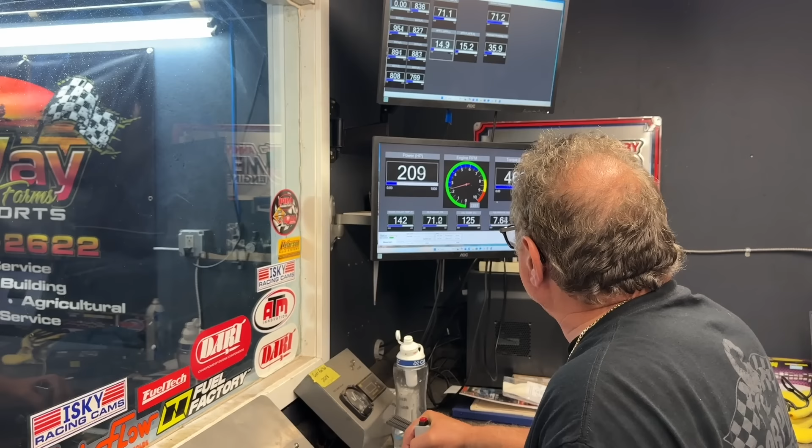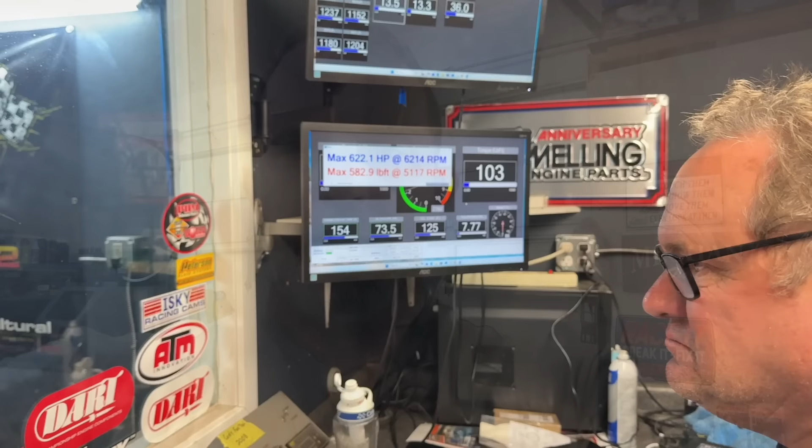Today's video is about two different heads that were tested at Bob's a couple weeks ago. One is 427 small block Chevy. They're both my port designs. One's a 232cc, one's 235cc. Let's get into this because this is some relatively cool stuff.

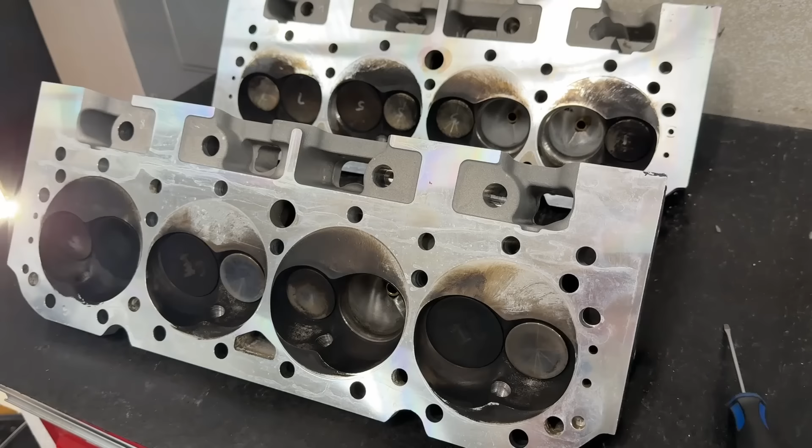Here are the two heads that got tested, and I'm going to show you the flow tests for these heads and also the dyno results with you as well. And we'll do the average powers and stuff as well. But they are a different design, which I'll kind of show you.

There are spots that I'm leaving off because I don't want to give away some of the stuff that was done, because this did take a lot of money and time and research to make this happen. But I'll tell you some of them, show you some of the differences.

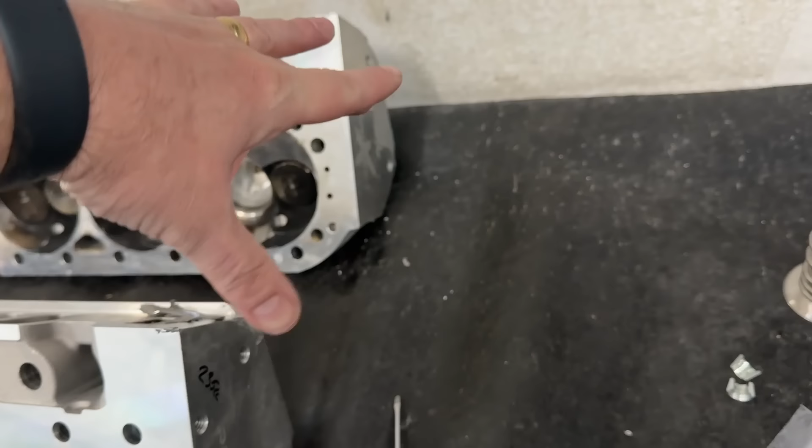So this first one, both of these are Pro Max castings, but they're a different design. This first one you can order from Pro Max or through me. I am a Pro Max dealer. This is the 235cc one.

Pro Max back in 2023 contracted with me to design a port for this, and I ported one for them, and then they had it digitized, and that's their CNC program. It's not on their website, which I do find strange, but I have seen it at the trade show, and I'm kind of happy about that. But anyway, this is what was done.

It is a 235cc intake runner, and the chamber size varies, but as they are now, they're 67 cc's. It has a 210 intake valve and a 1.600 exhaust valve. This is how it looks.

The big thing I want you to pay attention to is the vane, because the Pro Max heads, their Project X anyway, have the vane facing this way, much like AFRs. When I did the program, I left it just like that, I didn't alter that, I just left it like that. But I did think that's kind of a flow manipulation thing. So this plays a huge part as we get into it.

Now here's the thing, this is probably the first set that was done. So I had dyno tested the Project X 215s. I then had these ported, sent them off. Pro Max sent me the very first set, and I dyno tested against the stock 215s. And I'm going to show you some of those results as well.

Immediately after getting done, I was like, I wonder if I change this or this or this in the port, if it would be better. And that's what led to this one. So this 235 is offered through me and Pro Max. Both of us sell it.

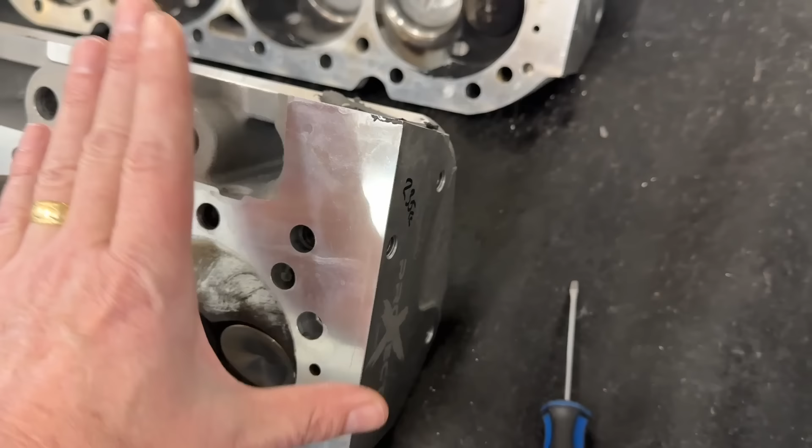As a note though, this is the valve I give you. So Pro Max does a rev valve, which is fine, but if you notice, this one has a back cut on it. When you get them from Pro Max, sometimes they do and sometimes they don't. That's why I charge more than Pro Max for that.

But anyway, again, after doing the test on that, I said, I want to know if I'd change stuff. And this is probably the biggest thing, two things really. I changed the shape on the short side, because the shape I use on this one I will not show you, I spent too much time and effort to do this. The shape on this short side is not the same on that one. I changed it because I wanted to see how that one turned out.

But the other thing, and this part I will show you, has to do with this vane. You see how the vane is this way? I wonder if it's just a flow thing, which looks really good on a flow bench, but may not actually be making any more power. So I changed it to a vane like that.

So this is the new one. The vane's this way, as you can tell, much more straightened out. Could I have straightened it all the way? Maybe, but it's kind of tough just because of the way the material was.

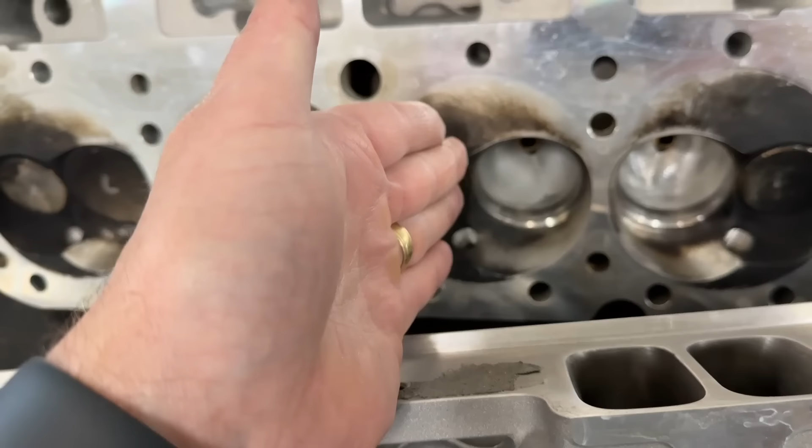So I left it that way, and I changed the intake valve size. This one, the port itself is 232cc's, so it's 3cc's smaller than this one. It's a 2.125 intake valve, so it's got a bigger intake valve than the 235. The exhaust valve you have to shrink down because you're running a 2.125 intake valve. So this has a 1.575 exhaust valve, just like my Dragon Slayers, compared to the 1.6 for this one.

The chamber size is 67 cc's, exactly the same. If you're wondering about minimum cross section, both of them are about 2.5. So the rest of the difference is in the port, which I'm not going to show. As far as exhaust ports, I'll show you the flow numbers, but they're relatively close, because it's a different size valve.

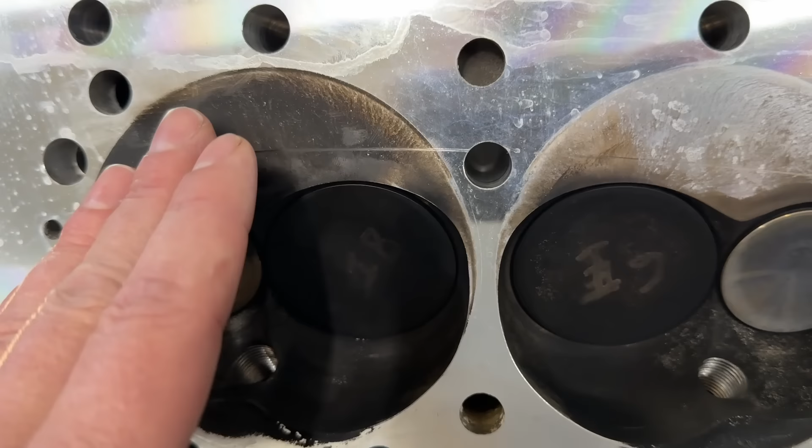Let's look at the difference in the vane. By the way, look at the head—these both came off Bob's. I was hoping to see a dramatic change in the burn pattern or the flow, but they're relatively close to the same. Pay attention to this one, and even this one. Trust me, I studied this for almost 40 minutes of wasted time, and yeah, they're virtually the same.

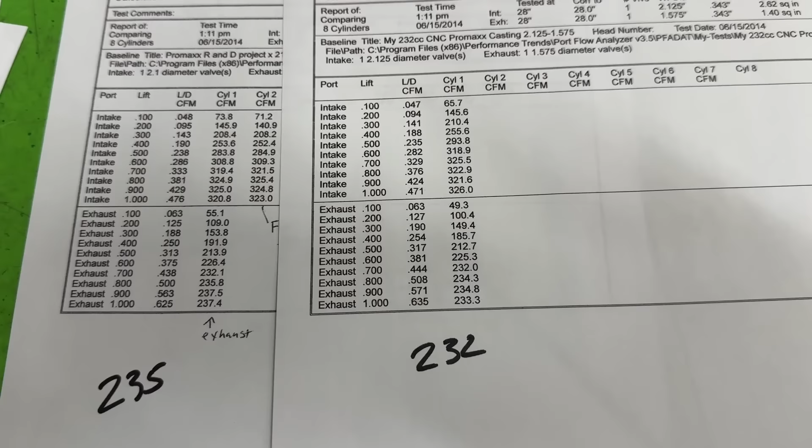Anyway, let's show you the flow numbers and dyno stuff that goes with it. This is the flow number, so we'll start there. This is the 235 and this is the 232.

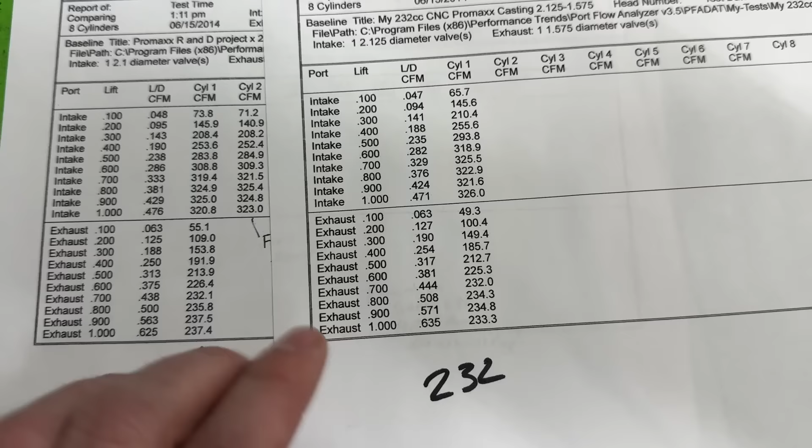So we're just going to compare them. If you're a truck driver, I'll say this out loud so hopefully you can hear it. By the way, they're in the books—I don't know about the 232, but the 235 is definitely in my small block Chevy book. My cord keeps snagging the page.

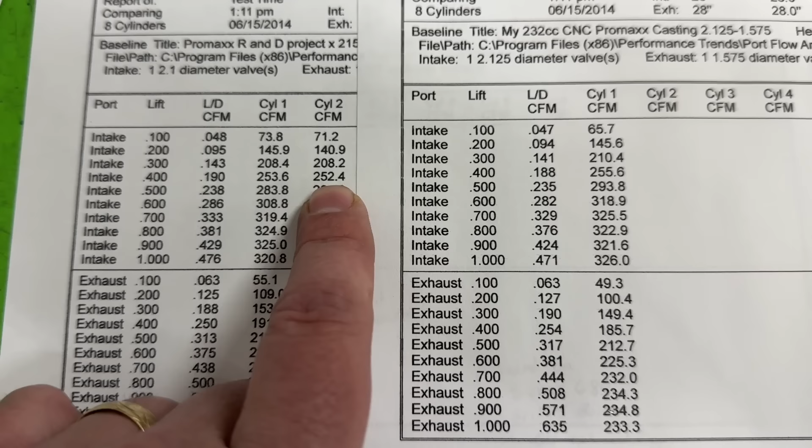Okay, we'll look at 400, that's my most important one. The 235 is 252 CFM, the 232, the smaller one, is 256. So relatively close, just a few CFM.

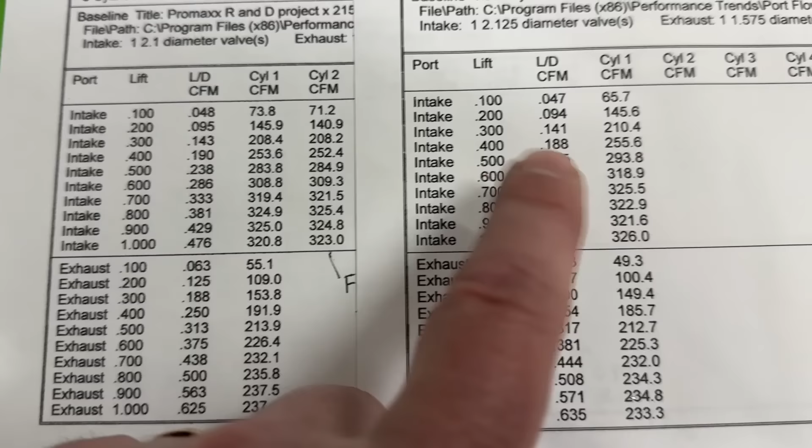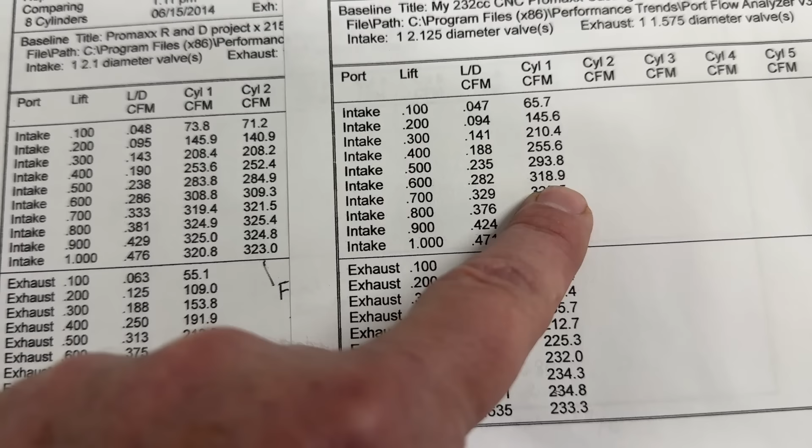At 500, though, this is a bigger difference. The 235 is 285 CFM versus the new version with the bigger valve at 294. That's a pretty good gain. At 600, the 235 is 309 compared to 319 for the 232. Definitely improvement there. At 700, we have 322 on the 235 versus 326, so it flows a little better, then drops off and comes back.

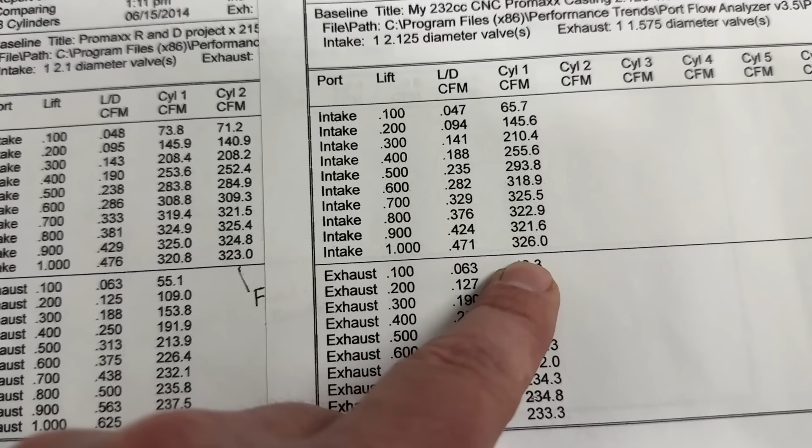This one ends up, the 235 ends up hitting 325. I'm going to pause for a second—I think FedEx is here.

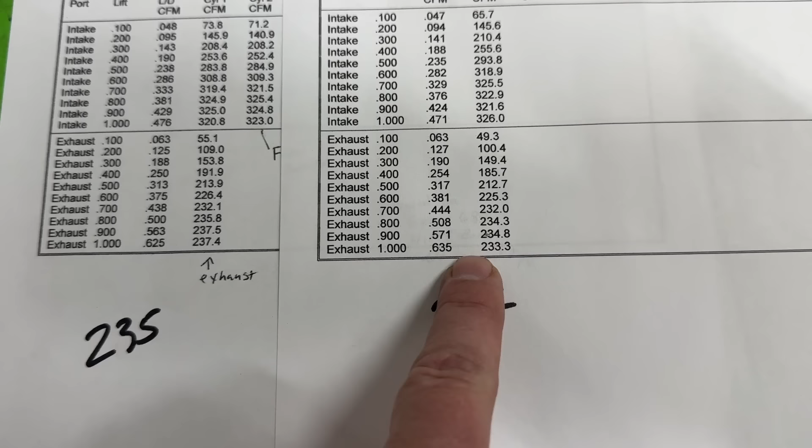Now for the exhaust side. Keep in mind, the 232 has a smaller exhaust valve, so the beginning lift numbers don't flow as well—just look at it. The 235 at 200 is 109 compared to 100 for the 232. Smaller valve hurts it, but we'll focus on 400.

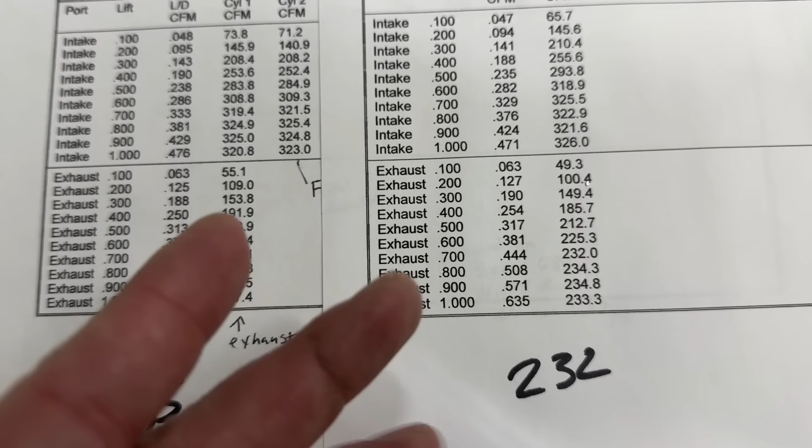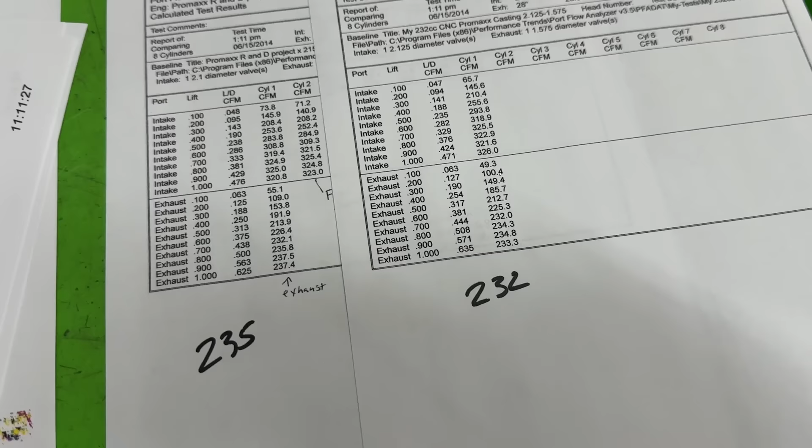192 on the 235, 186 on the 232. So it's off, but not by a ton—you look at 214 versus 213, they're somewhat close. Peak is 237 to 233 or 235, they're right there, close enough. So as far as flow wise, they're relatively close. There's maybe some advantage on the 235, but not overwhelming. The dyno does tell things a little differently, but not as much as I was hoping for.

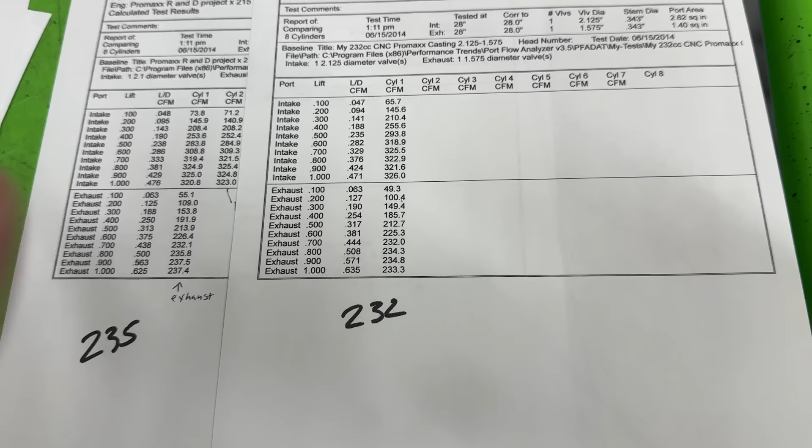So here are the dyno numbers. If you made it this far in the video, I thought I'd tell you the engine specs. I actually did this first, and that's the reason I deleted the video, because somehow it didn't record my sound. Anyway, here are the specs on the engine.

It's a 427 small block Chevy, 4.125 bore, 4-inch stroke, about 10.3 compression ratio. It's got an Isky hydraulic roller camshaft, a shelf cam—the OMG 79 cam, which is 248 degrees intake, 254 exhaust, 109 lobe separation, and .640 lift with 1.6 rockers. It also has a Trick Flow R intake that's been milled down—you'll hear more about that later in this video—and a 1050 4150 carburetor with annular boosters.

Here's the power from the 235cc heads. These made 621 horsepower at 6,300 RPM—yes, I round up—and 584 foot-pounds of torque. But on average, between 3,000 and 6,800 RPM, it made 602 horsepower and 539 foot-pounds of torque. Not bad, it's very respectable.

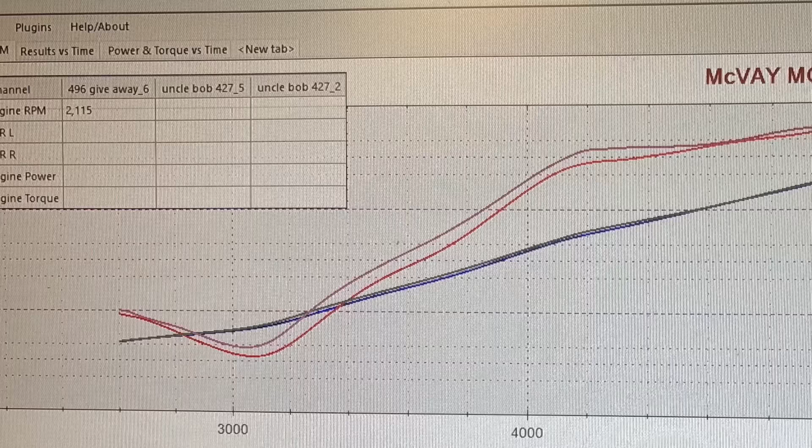This is the power from the 232 head. It made 625 horsepower at 6,500 RPM and 586 foot-pounds of torque. So it gained 4 horsepower peak and 2 foot-pounds of torque peak. Averages were 604 horsepower between 3,000 and 6,800 RPM and 541 foot-pounds of torque.

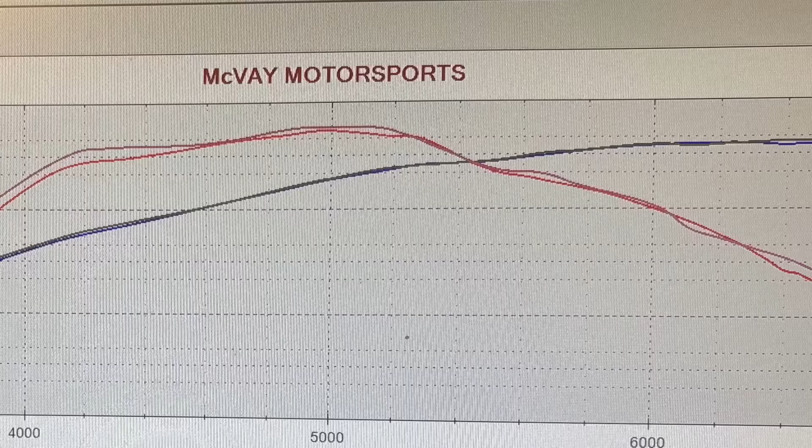So on average, it gained 2 horsepower and 2 foot-pounds of torque. So there's that. Here's what the graph looks like. You'll probably have to zoom in to see this, so do your best. That purple line is the 232, so you can see it's lower, kind of matches in the center, and then it's virtually identical as you go up through the range, so it trades off and on, but close.

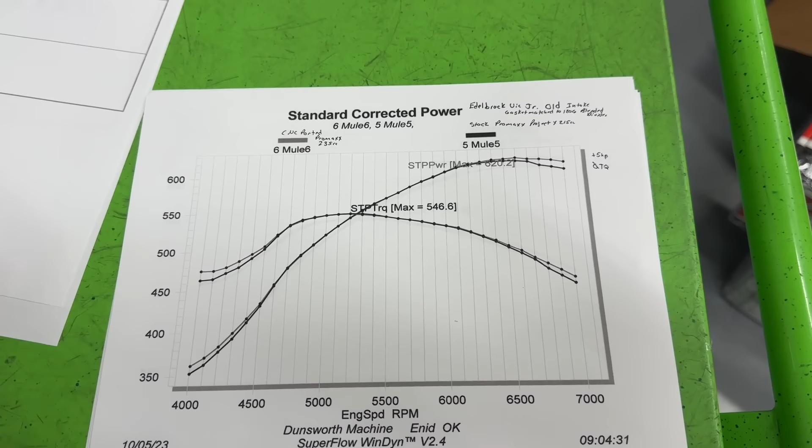Now that you saw the dyno numbers on Bob's 427, I want to tell you a lot of R&D went into the 235. I actually tested it with a whole bunch of different heads and intakes, and some of this gives insights into why there isn't as big of a change or difference in power as what I had hoped for. So bear with me as I try to explain this.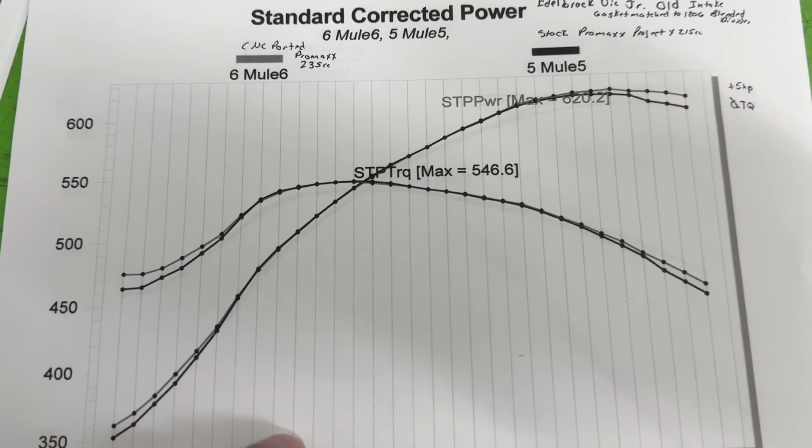Now the picture isn't colored, but don't worry, wherever you see the lines are above, that's the 235. So at the lower RPM, 4,000, the 235 is beating the 215, and also at the top.

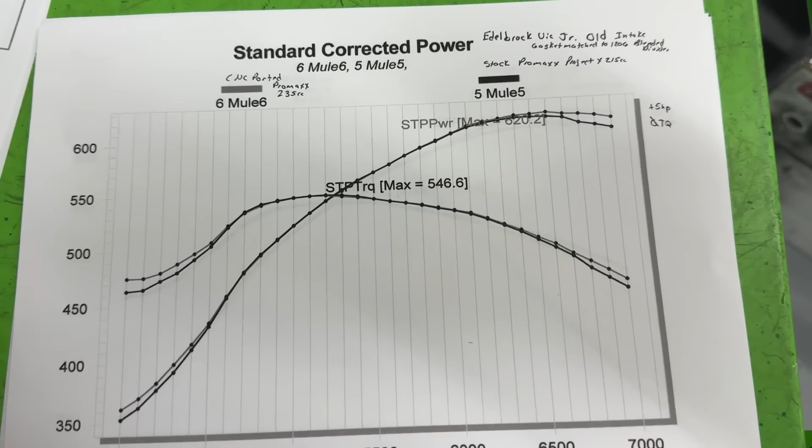Now here's what's interesting. This is with the Victor Jr. intake, which is the same one we also used on the 406 at Bob's. It's magic, it's been great on everything. But if you notice, the differences really aren't that great.

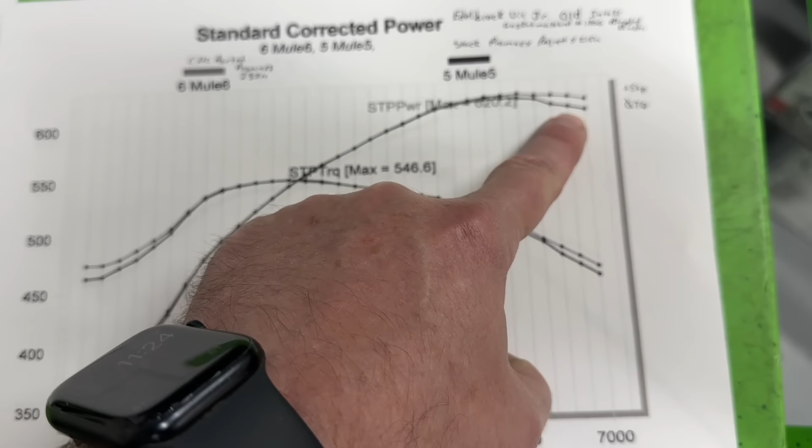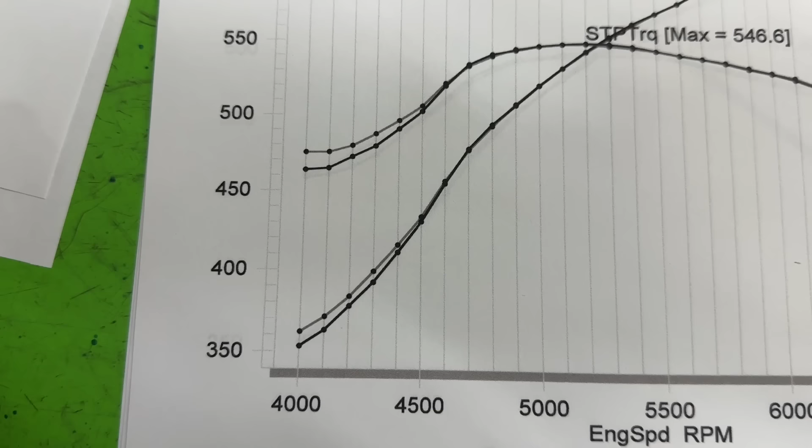It's 5 horsepower and 0 foot-pounds of torque difference. But there's some differences at the top and at the bottom, which goes against conventional wisdom, because I've been saying this forever - just because you hear it on the internet, velocity, velocity, velocity, every time.

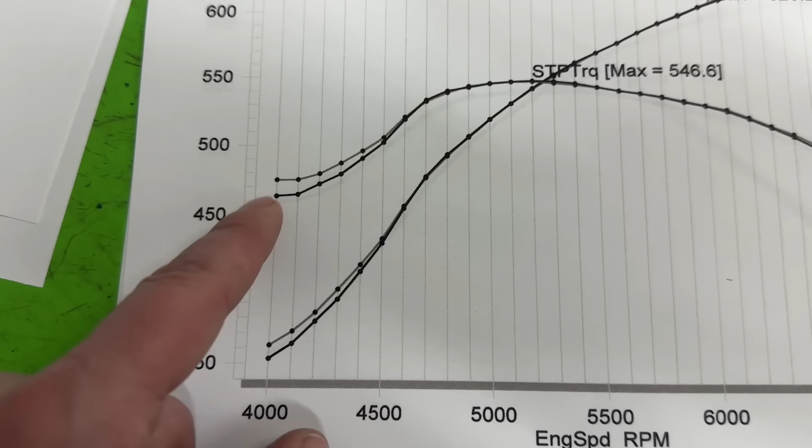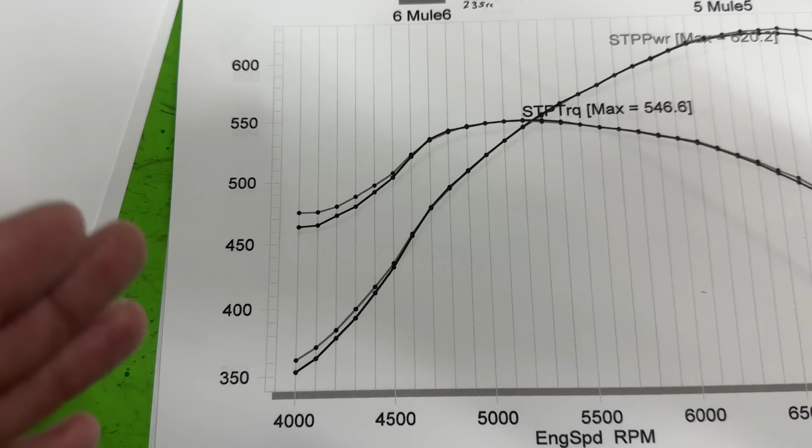And it's been almost uniform at this point. At the lower RPMs, usually between 4,000 to about 4,500, the bigger head does better - almost to the point I could say with certainty it's better. Now, if we went to a lower RPM, maybe it'd be different, but in that range, something about it, the bigger head's better. So then it's a lot better here. Something to think about.

However, if you notice, that's not much of a difference, right? It's only 5 horsepower, somewhat like what we had with the 232 versus 235.

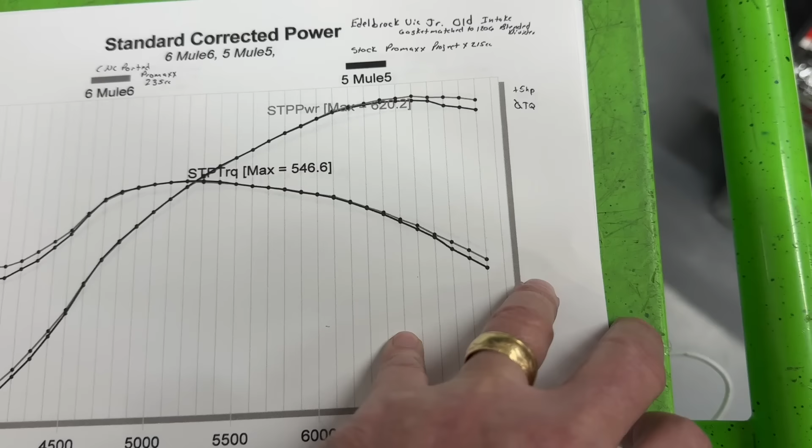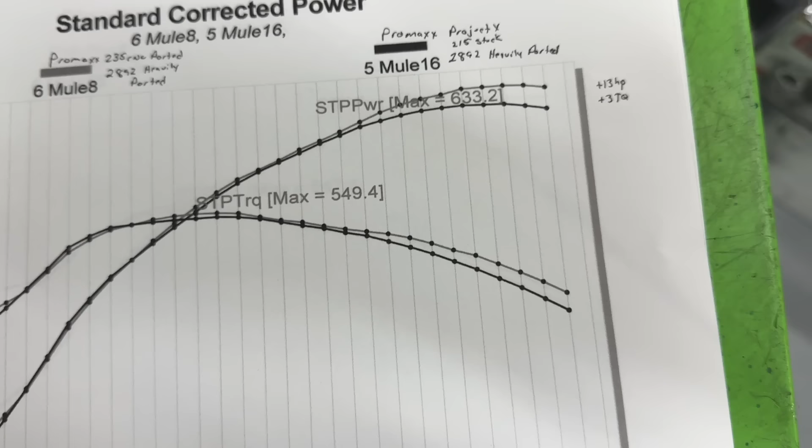But we switched intakes. This is the difference when we switched to a heavily ported 2892 that we had at Bob's. Again, the bigger jump here, the 235s - but the difference grows at the higher RPM. So with this intake, the difference between the two heads was 13 horsepower and 3 foot-pounds of torque. So the differences grow when you have better intakes on it.

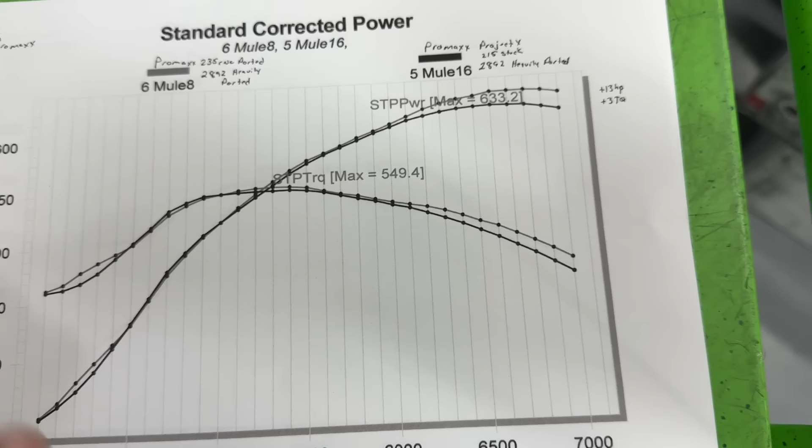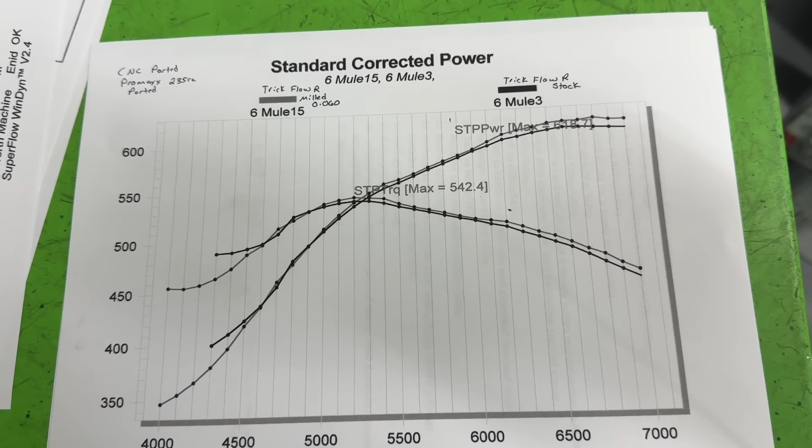So if you've got a crappy intake, it's kind of holding you back, you're not going to see the differences. And the final thing I want to show you is the intake that was tested on Bob's - a Trick Flow R that I owned because I had done this test. The very first time we put the 235s on, we put the Trick Flow R back on, and I was like, this does not line up well at all.

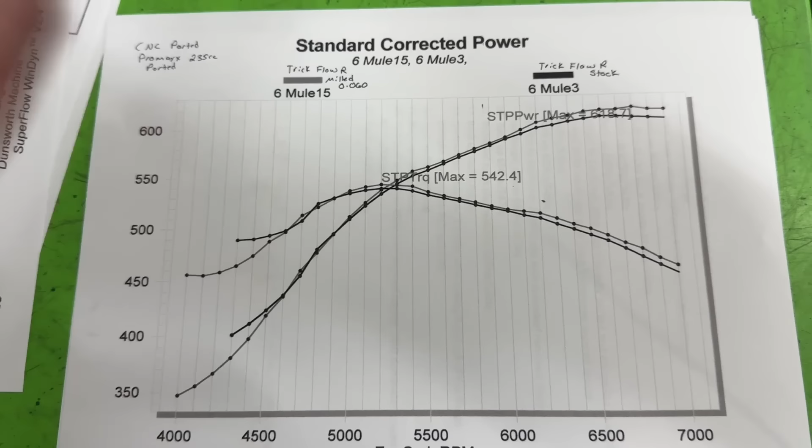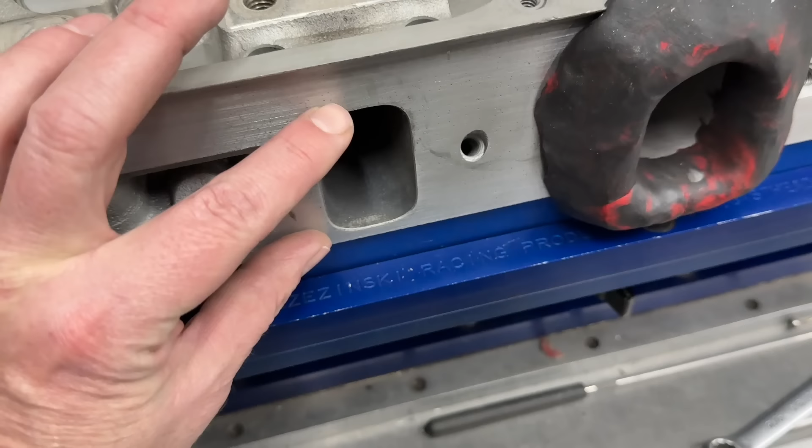The ports were off because it's not port matched, it's just high - because the head's been milled, so the intake's sitting higher up on the heads and it's blocking the roof part. So let me give you an idea: here's your port, the intake should be sitting with its top here, but instead it was way up here. I could literally see the top of the head.

Not good. So what we did with that Trick Flow R is we milled 60 thousandths off each side, and what that does is it causes this to come down to meet the top of the port.

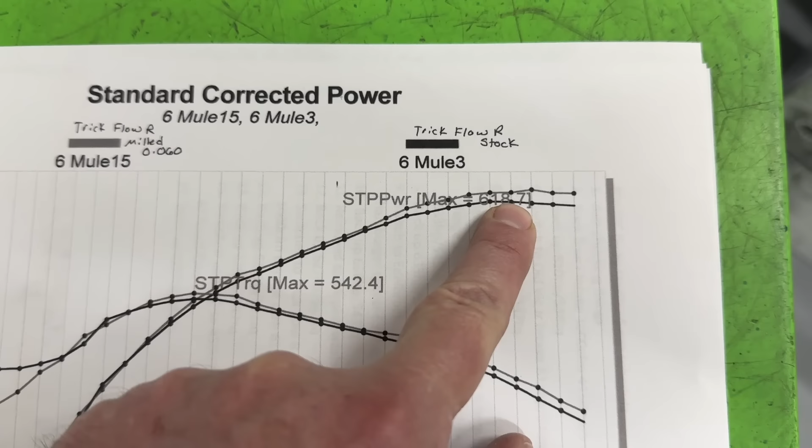It gained 15. It didn't do much on the lower RPMs until about 5,000. From that point on, it gained.

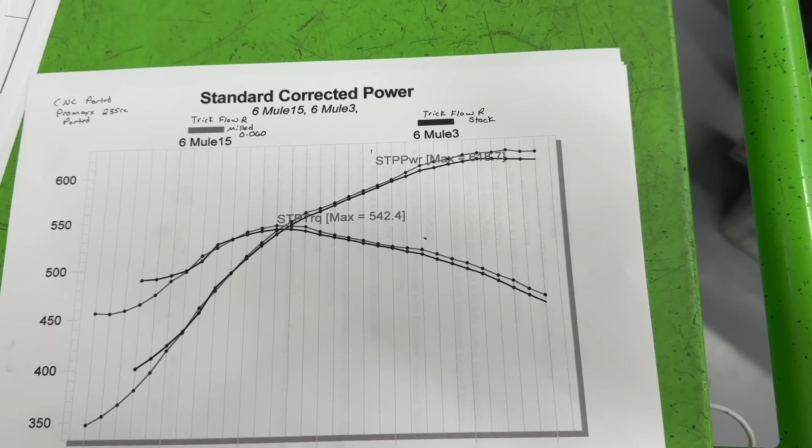This is the intake we use to test the 215 and 235 heads. This intake doesn't seem like it holds it back, but I thought I'd share that with you. It's an interesting thing, and that's why I used it at Bob's.

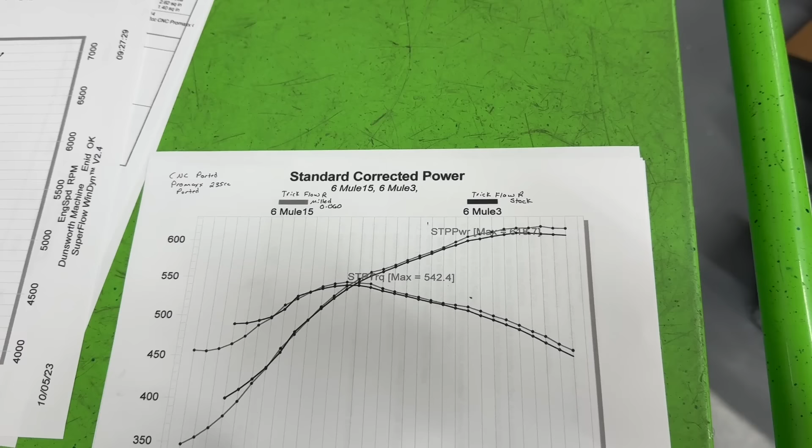So the differences between those heads, not as much as I'd hoped. People keep saying things online continuously, and every time I test it, there's a little nugget of truth to it, but more BS than there is truth.

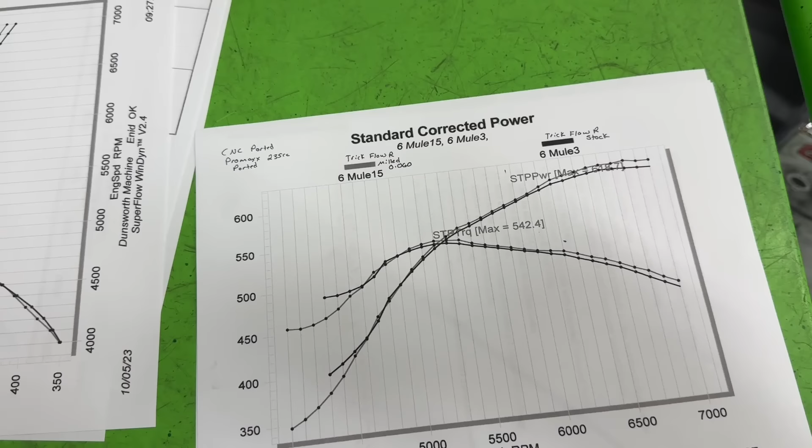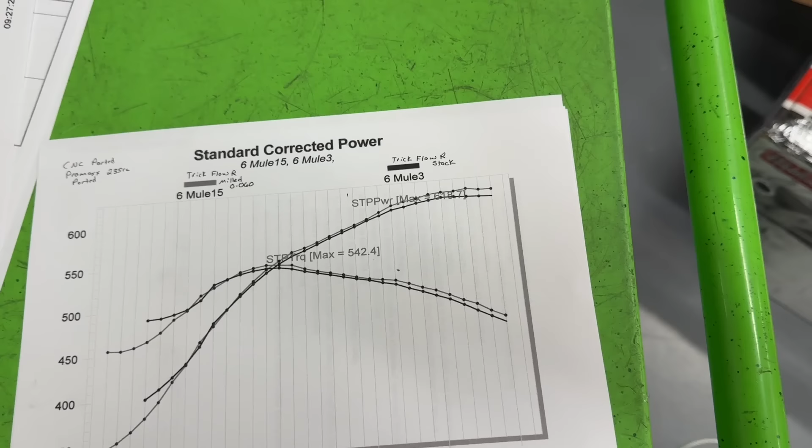Because I used to hear velocity, velocity, velocity, which is true, but not what you're thinking sometimes. That's why we test. So velocity is important, don't think I'm not saying that. But so far, every time, it's not the lower RPMs. It seems like in the higher RPM is where the velocity makes a difference, not the lower, kind of opposite of what the internet says.

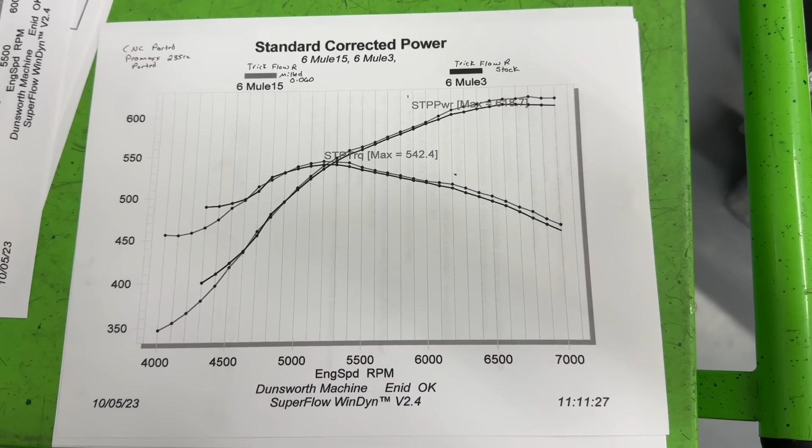The other thing the internet kept saying was a whole bunch of different things that just turn out not to be true, at least every time I test it. And I know I'm going to get some backlash even on this, even though I actually have results.

So the other thing I kept hearing was shape. The shape is the most important. If it's not velocity, they're like shape. That shape that's in the 232 has a better velocity coefficient. So let me try to explain.

If you take a probe, that's what I've got here, right here. This is a velocity probe. And I put it in the port, inevitably, and this happens with all heads.

On the short side, typically you have faster speeds through here, slower speeds up here. The port design on that short side for that 232 is more uniform. In other words, if I went from the slowest speed here to the fastest speed here, the difference is less than it is on the 235.

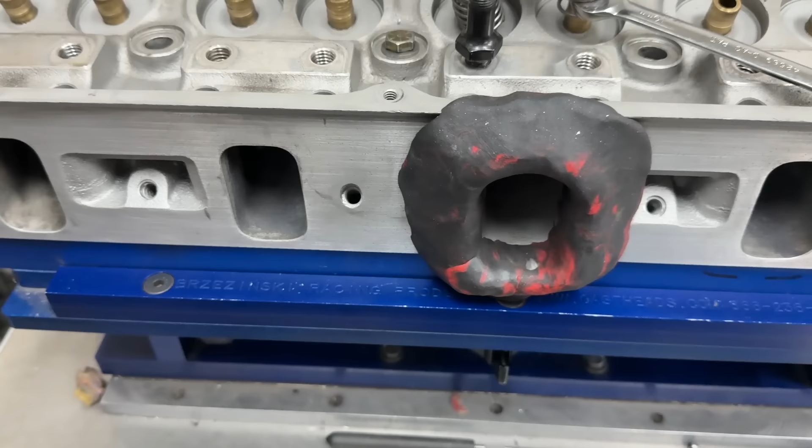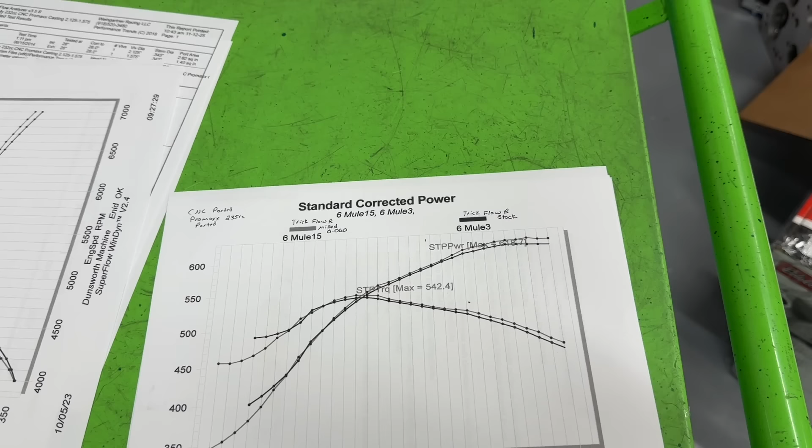The shape seems like it's magic, wasn't worth that much. So here's the catch though, and that's the same thing with velocity. It's not uniform. If the engine was turning more RPM, or we had, making way more power, the differences between the shapes might have been there. But in this application, and 620-something horsepower, doesn't seem like it's doing much.

So something to keep in mind, but there's one more thing I want to show you, because this one, if you own the Promaxx heads, you need to know this. This is the last thing I want to leave you with, and this is somewhat important, so pay attention.

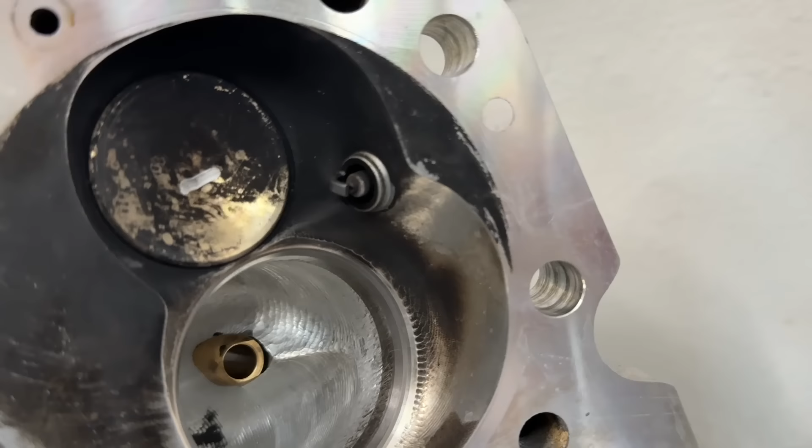Now, was it quite as bad? Well, my camera's having a hard time. There we go, let me see if I can get there. Yep, there's the bad one. You can see the top thread completely. It wasn't quite as bad, maybe 20 thousandths less, because whenever it does the CNC stuff, it cleans this up, so it removes like 20 thou. But this is still obvious.

It's obviously not right? I was like, ooh, I'm not liking that. Because, and I'm going to go with this, so bear with this, it's going to get a little tangent here. I had a guy comment, and trust me, it plays a part in this.

I had a guy comment, and he said, I showed last Saturday's video, he's like, this head, right? And he was talking about this head. This head is trash, trash. Because you could see the threads right there. See how the spark plug is? You can see the threads.

This one, by the way, is very similar because it's not all the way out. This covers up more and actually somewhat puts it in a better position. But anyway, he's like, that's trash. You know, Jim's Automotive, he cleaned those threads up. That's going to cause pre-ignition, which I've got to get into real quickly.

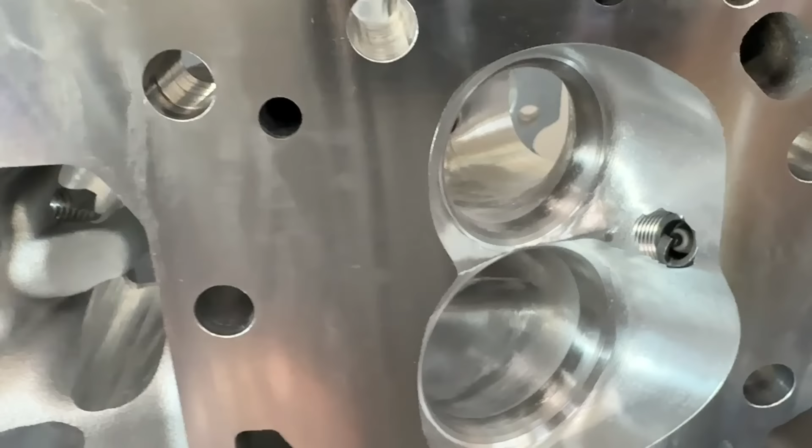These threads that you see right here, and I'm going to back out the spark plugs, you see them. Those threads in the aluminum are not going to cause detonation. You're like, it won't? Let's just do some science for you real quick.

The hottest part of the chamber, what's the hottest part? The hottest spot in the chamber, because you say hot spots cause pre-ignition, which I agree. The hottest spot in the chamber is the spark plug, not the aluminum, period. It's the spark plug. You're like, let's just do some science. Aluminum transfers heat way better than steel, just the facts.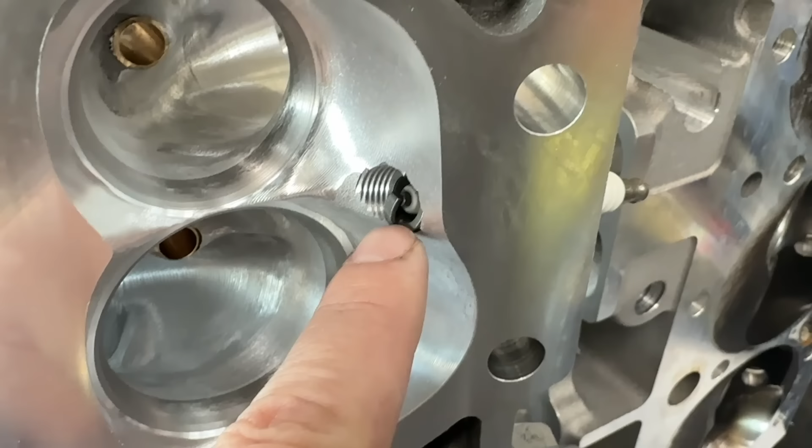Hitting it with electricity, heating it up, it can't transfer heat. It's steel, so it doesn't transfer as well. That will, that won't. Stop saying that stuff.

However, this is a problem, because in this case, if you look at it, you've got threads showing. So you actually have 100% sharp threads and steel. Look at this, you've got steel out there in the middle of heat. This will cause pre-ignition, more so even than the spark plug electrode, because that's a very sharp, fine point. It can definitely hold on to heat.

It's steel. There's no water trying to cool it where it is. It's out there exposed, unlike this where there's water behind it. That will cause pre-ignition. So not ideal. And you're like, so what do you do? Here's what you need to know.

The Promax heads, and even this is my DB head in case you're wondering, come from a factory in China, a guy named Steven Sun, and they're made by him. The problem he has, and it's not this part, it's not that we cut out too much of the chamber, that's incorrect. It's that when he machined this flat spot right here, he sunk it too deep. So he cut this too deep, pushing the spark plug this way too much.

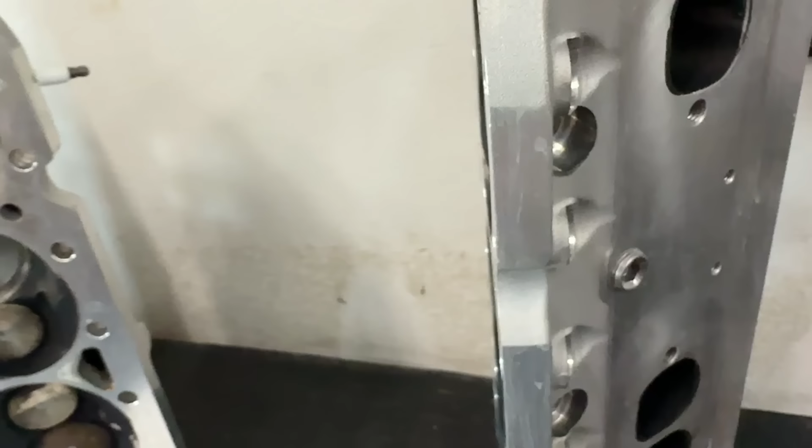No bueno, right? It does have somewhat of an advantage for some of you that have header clearance issues. You could get a lesser reach spark plug, get it to where you need to be, and your headers will clear. So that's a benefit. Disadvantage, if you run a 3/4, you're going to have that sticking out. How do you remedy it? It's a $6 solution. It's this, this is the part number, Moroso.

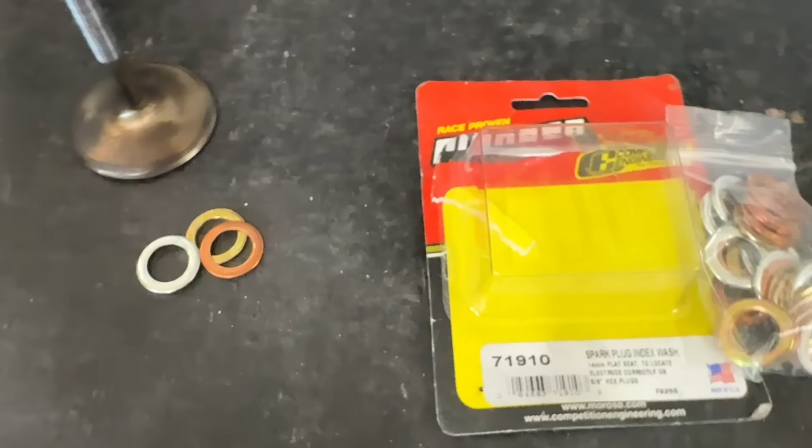71910. These are indexing washers. So what you do, and I'm going to pause for a second, audio might not be great for the rest of this. My mic died, so I had to retape this.

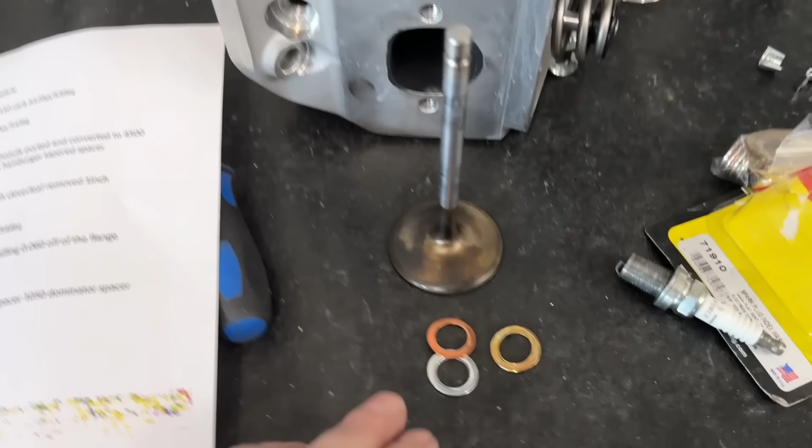Essentially what you do is take the amount of washers you need, at least this is what I use, a silver, a copper looking one, and the gold looking one. You put them on the back, and it brings you to this spark plug location, which is where it should be. So now it's flush and everything's good with it. That's exactly what should happen. That's an easy fix, an easy remedy, and that's the way it is. $6 and you got yourself fixed.

Interestingly, because I don't just speculate, I actually test stuff. I wanted to see if having it like this versus not having the indexing washers made any difference in power. There's a little backup to this. Almost every time I've tested the projected tip spark plugs, which are what these are, versus the non-projected tip like this, the projected tip has done better.

So one of the thoughts I had when I was dyno testing the Project X initially was, okay, let me just take out all the washers, because that'll bring that spark plug, just like what you saw, all the way out here. Maybe it'll make more power, right? Well, I tested it, and here's what happened.

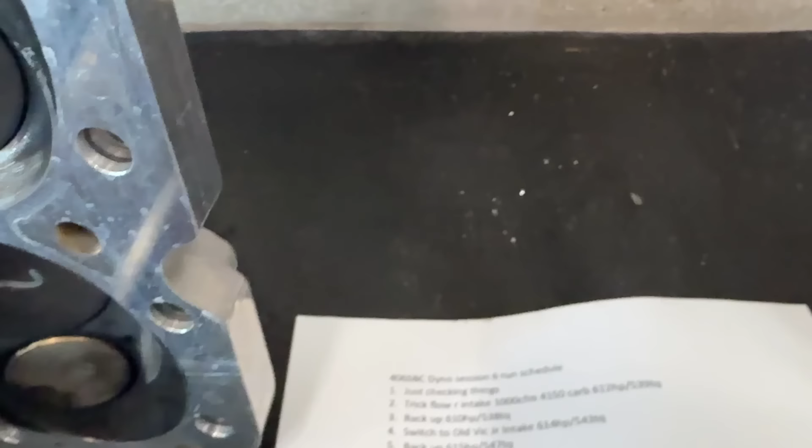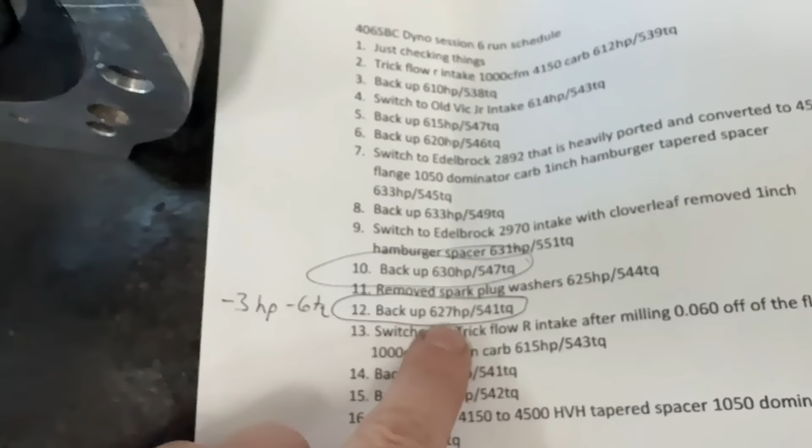So before is what you saw just a little while ago, to now. Initially, set up like this, on the 406 dyno mule, made 630 horsepower, 547 foot-pounds of torque. All I did was remove the washers, took them out and re-dynoed it. It made 627 horsepower, 541 foot-pounds of torque. It lost 3 horsepower and 6 foot-pounds of torque with that spark plug further out. In other words, without the washers on, it brought it out and it lost power.

You might say, well, that's detonation. This thing ran straight timing, 38 degrees from 38 degrees at 1,000 RPM, 38 degrees at 7,000 RPM, and on pump gas, 11.3 to 1.

No signs as far as detonation-wise, and I pulled off the heads enough to see something. Nope, that part, no—it just didn't make any more power. So maybe it was on the verge, but it wasn't happy. So this is the better option.

Easy fix, easy thing to do. But again, these aluminum threads aren't going to cause detonation. Those exposed spark plug threads might, but not that. So something to keep in mind.

Also, if it helps you think about it, and I know this because I've had so much heads come back—so I have heads come in for refresh and whatnot, and just different people sending in heads. A clear, easy way to see is if there was detonation in the spark plug threads, what you should see is it burning out right through here. I don't see that. On nitrous stuff, heavy nitrous stuff, usually it burns on this side, because guess what's causing it? You're right, the electrode. It's lighting up over here and it burns that away. But it's not lighting up here.

It doesn't. And here's something else to think about. You smooth those threads up right here, and I'm not knocking Jim's video—he's perfectly fine to do it. It's just a visual thing, it does nothing either way. But you make those threads perfect, right? You smooth all that out. You still have the sharp edge this entire way. It's there where the spark plug isn't. So unless you take a die grinder and smooth it all out, you still got it.